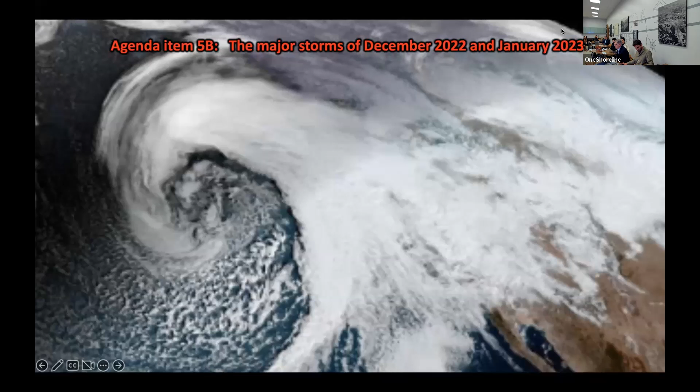This item concerns the major storms that many people have been talking about, and you've undoubtedly had presentations or discussions on it in your city councils and boards of supervisors. We'll discuss it today from One Shoreline's perspective, and also invite representatives of two cities to make brief presentations. Azalea Mitch is here, the Public Works Director from the city of San Mateo, and on the Zoom line is Lisa Peterson, Public Works Director from the city of Pacifica. First, I'll go through a brief summary of some shoreline activities.

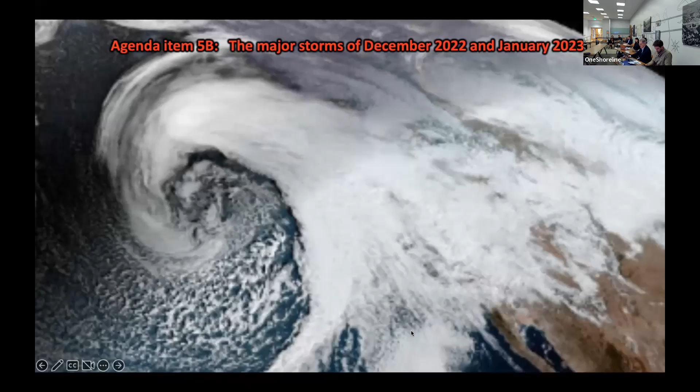Here's my high level take on the storms: the pattern of extreme storms that followed extreme drought is extraordinary when viewed through the lens of the past, but in terms of the future, it's considered ordinary. That's the way I think we should all be thinking about it — not that this was some once-in-a-lifetime event, but that this is the new normal, and we should start making decisions based on that. Certainly we are trying to do that here at One Shoreline.

The flooding impacts near both the Pacific coastline and the bay shoreline are increasingly compounded by high tides and sea level rise, and we've already seen that. Finally, most of the storm impacts cross jurisdictional lines, and that really speaks to why we're all here today, having created One Shoreline a few years back.

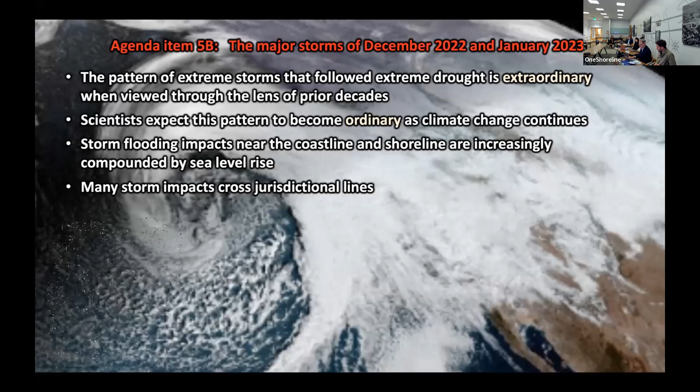A couple of images to show. This was an image from the mobile home park in the city, called the RC Trailer Home Park, shortly after the December 31st storm. This is an image of one of the residents taking us on a tour. In the middle of the picture is one of their seriously antiquated and overwhelmed pumps tasked with moving water out of this mobile home park and into the Bayfront Canal, where we did a project.

We'll talk about the Bayfront Canal project and how it performed. But I wanted to highlight that this area of five mobile home parks is not going to improve just because of our project. They need to be able to move water out of their area into the Bayfront Canal in order to completely eliminate the water buildup. They had a much better winter, a better experience resulting from the storms, than they would have had without our project, but they still saw flooding. Until these pumps are addressed, they're going to continue to flood during these major events.

The next picture is from a water treatment plant in Half Moon Bay. Thanks to Debbie Ruddock for this photo, which she took on the 31st. This is the electrical room, part of an electrical building that provides energy for the water treatment plant. I was there about one to two weeks afterwards with Debbie and one of the plant managers, and there was approximately 8 inches of water in the building — above the level of some electrical equipment and some conduits between equipment. That's a very serious issue that needs to be addressed.

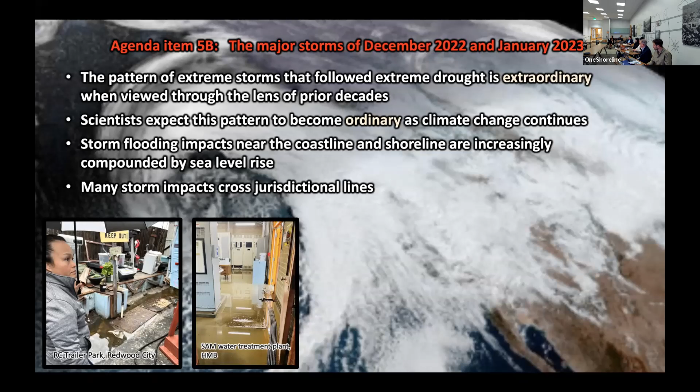They were able to break the vegetation jam and the water stopped flowing in, but they had to turn on the pumps. We were very close to just losing power, which would have been devastating. It was terrifying — I was the chair of the sewer authority at the time, so I was running out there with my waders. It was not a good situation.

Sticking with the coast for a minute, this is Highway 1 at Surfers Beach, and you can see how close the erosion is now getting to the highway and the cars. This picture was taken after the storms concluded, and this highlights the connected nature between what's happening there at Highway 1 and Surfers Beach with the whole area of the Pillar Point Harbor. Despite the fact that Caltrans has been trying to armor the highway with all that rock placed there, which you can see on the left of the picture, it's not working, and the erosion is getting very close to the highway. Obviously Caltrans knows a lot about that.

So was there additional erosion because of the storm? Yes, additional erosion, and actually a significant amount of additional sand deposition just south of this area that we saw pictures of. It's all tied together as the problem of too much sand in some areas, too little sand in others. The too little sand definitely contributes to the erosion problem, and this was made worse by these storms.

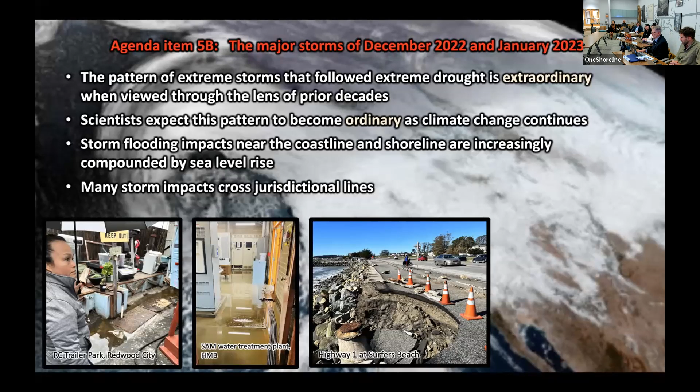And then finally, a little bit of levity, in San Carlos at the Trader Joe's. This is a post from somebody that says, if you need anything from Trader Joe's, bring your kayak. There was a lot of water at this location, which is a Walgreens and Trader Joe's — I'm sure Mayor Rak is well aware of that. There were people kayaking to get to the spot, but it was closed, actually for a couple of days, because of the cleanup afterwards too.

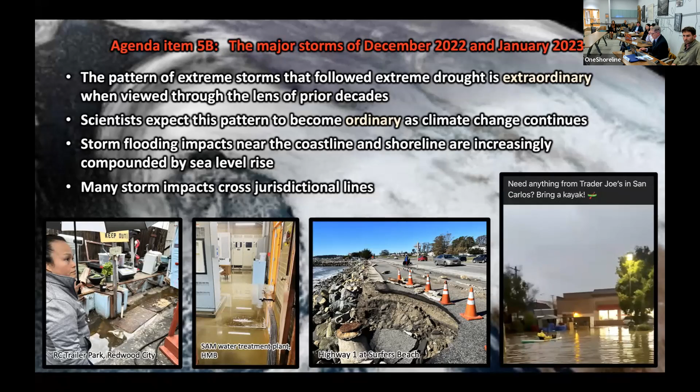So those are some of the impacts. In terms of our activities, I'll divide it up into about 5 areas: the Belmont Creek dredging that was mentioned in one of the public comments, the Bayfront Canal project that we concluded about a year ago, San Bruno pump stations that we own and operate, mapping flood impacts and our early warning system, and then, as I mentioned, the City of San Mateo and Pacifica discussed this too.

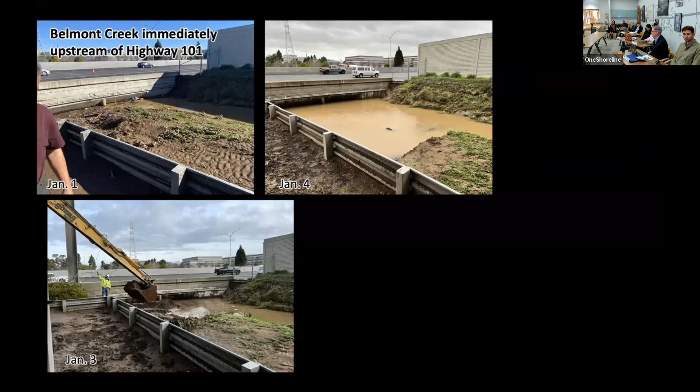There is a very large electronic sign for the highway, and it was in the way of the equipment. We also needed to get out there that day because the storm was coming, and we moved to a portion, an area upstream, that we'll talk about in a second.

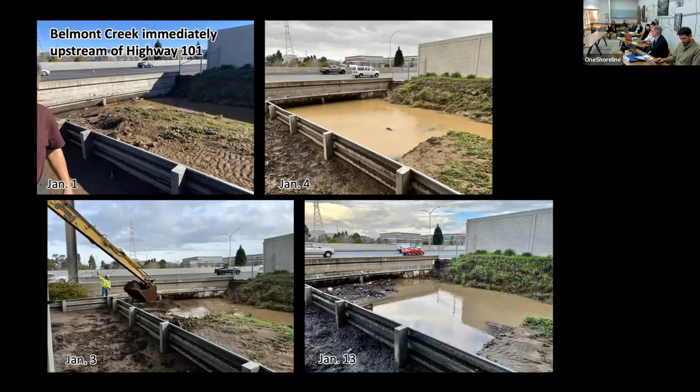This is a picture of the same spot 10 days later. What you'll see is there's debris that's built up just at the upstream base of the highway. That's because underneath the highway there's still a lot of mud and the debris can't flow through. So the city of Belmont and the county have been in touch with Caltrans numerous times to see if they can clean out underneath the highway. Until they do that, there's going to be a big problem here still, no matter how much we do upstream. That's something we all want to keep an eye on.

And then, as I was saying, upstream we wanted to go on January 3rd. This is work that was done in the evening of January 3rd by Industrial Road, an area that also flooded on New Year's Eve. So that was a key activity of ours, to quickly get that contractor out there and dredge the channel.

In terms of Bayfront Canal—we have a question. Yes, of course. So back on that past slide, when you have to dredge underneath these walkways, bridges, or freeway, does that have to be done by hand, or is there equipment that can get in there? Well, there is equipment that can get in there, as far as the equipment can reach.

I'm not really sure how Caltrans will solve this problem. In my previous position, I was at San Francisquito Creek JPA, and we dredged underneath a frontage road called West Bayshore Road, and their equipment could get pretty far under there, probably in the range of 25 to 30 feet.

So that's kind of what we would expect. You would want to do that when it's dry and not during a storm, and that would probably aid in the ability to get under there. But it's hard, it's challenging. As you can see, as much as you can tell from the picture, it's a pretty small opening. And unfortunately, it's smaller than the width of the channel upstream of there, so it's going to be a big challenge.

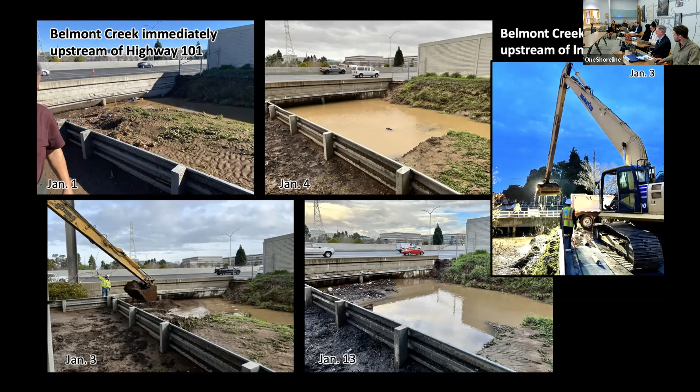Okay, I'll advance these. Bayfront Canal. The December 31st storm was more intense than the last biggest storm they had. They've had flooding since December 2014, but that was a very large event for that area. This storm was more intense and coincided with a higher tide, but they saw less flooding. So that's how we were pretty confident that the project we completed there made a difference this time—the conditions were worse, but the flooding was less.

But they did see flooding, as I mentioned, and that's largely on account of the pumps specific to the mobile home parks. Street and surface flooding, I would say, is a result of storm drain capacity in the area, which is challenging.

So Len, can you talk a little more about the pumps themselves? Is the property owner responsible? Are we required to do anything to help improve the pump? So it's complicated there, specific to the mobile home parks and the one trailer park. They are regulated by the state of California, as I understand it, by the Housing and Community Development Department. When I was out there and showed that picture of the woman with the pump, we were there with Senator Becker and his staff and Redwood City staff, talking about how to make progress on this. It's a very difficult situation because the city doesn't have jurisdiction to work in that area, from what the city reports.

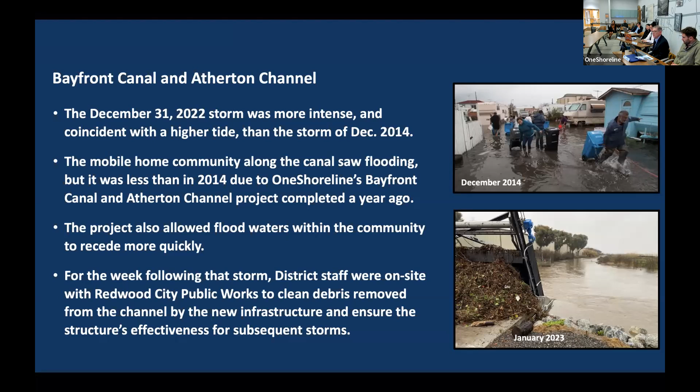It was really the first time it was tested since we put it in, and there were problems with it, but the problems were solvable, which is great. And it worked. So that's Bayfront Canal. Any other thoughts about that?

So in terms of San Bruno, we have at One Shoreline a flood zone there that we inherited from San Mateo County, and we get property taxes from residents of San Bruno to pay for, operate, and maintain the pump stations there. San Bruno has a history of frequent flooding for a community called Bel Air, which is probably one of the least resourced areas of the city. So we've been working with the city and the San Mateo County Public Works to monitor and maintain the pump stations. They drain water from the streets of the Bel Air neighborhood and other parts of San Bruno, and they pump it into the creek.

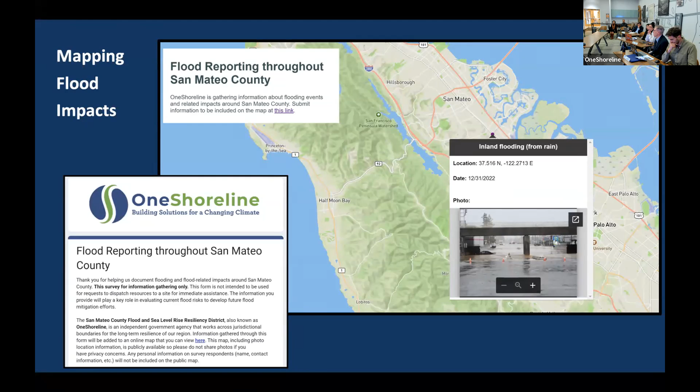Okay, kind of pretty soon wrapping up. We also developed an online resource to map flood impacts, and we're just about ready to launch it. We've collected a lot of pictures, a lot of data about the storms, and we want to collect more of that, not just to understand the current situation, but also as we plan future projects and where water is going right now. There will be more information coming shortly, I'd say in the next 10 days or so, when this is ready to launch. We'll invite people to upload their photos, and we could geotag it for specific locations in the county. That could be publicly available information, but it will certainly help us with our project design work.

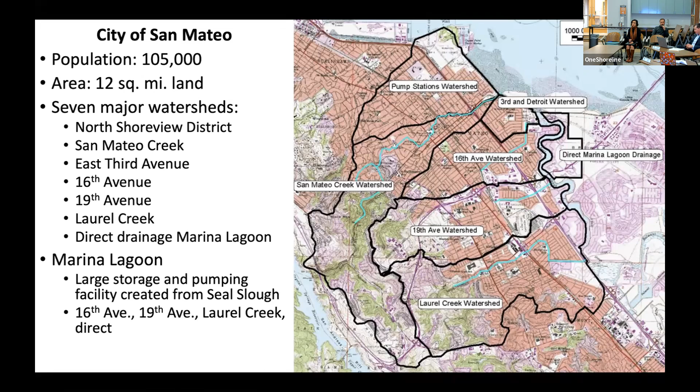Next slide. So in terms of wet weather, we actually begin preparations in October. We have quite a few hundred miles of sewers and storm drains. When it rains, our sewer system capacity is exceeded, and we often experience sanitary sewer overflows. So that's something that we have to monitor as well. Although we have a $1 billion program, and we're investing in building new sewers and expanding the treatment plant that we also operate.

In total, we have 37 pump stations that we maintain and operate, many catch basins. I have to say that I always have to speak about our workers, because for those 37 pump stations, we have a pump crew of 4 staff. So when folks call us and say we haven't seen you, it's because we've got 12 square miles.

A lot of lines of sewers and storm drains that we have to clear up. So we're constantly clearing catch basins, trash racks, as Len explained. We have devices that help move trash out of our creeks, and we move leaves and debris. We have a 24/7 sandbag station where anyone can go and make their own sandbags. When we have a wet weather event, we ask our workers to get on standby. If we have an issue 24/7, we call them up so they come and address it.

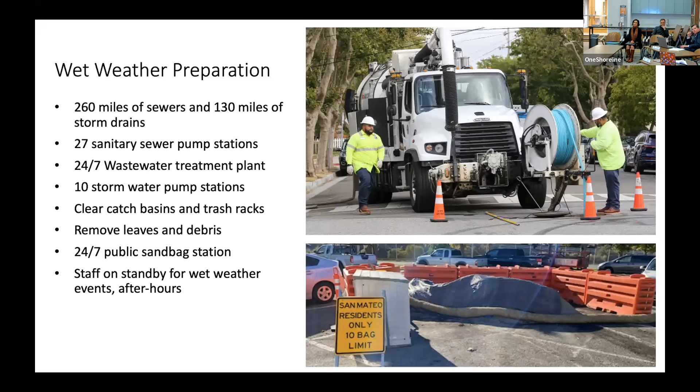In terms of New Year's Eve, as Len said, we had something that will become more normal. We were expecting 0.95 of an inch based on National Weather Service reports, looking at the gauges in the city of San Mateo. We actually received 4 to 5 inches. Within 3 hours, that registered in sections of our watershed as a 100-year storm, and in 12 hours it was a 200-year storm. We were very overwhelmed, and it happened beginning at 3 in the morning.

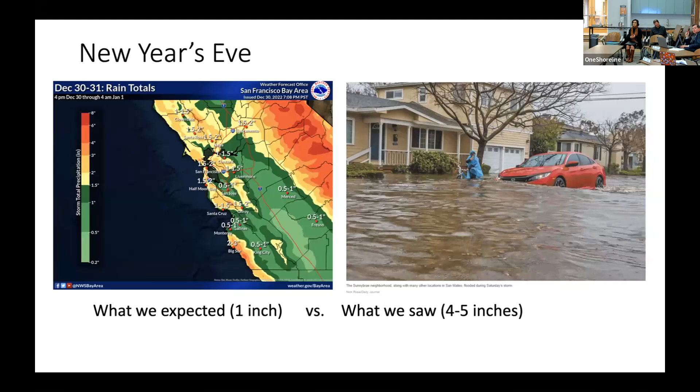We received alarms at 5 in the morning, and by 8, that's what our residents experienced, a lot of flooding throughout the city. We responded as best as we could. These pictures were actually taken, 2 of them by me. Our staff had been there since the early morning hours, removing trees that washed down and doing what they could on catch basins. Then we had our 42nd Avenue underpass flood because the pump station was overwhelmed and the motors were underwater, so we had to respond very quickly to a life and safety issue.

Dealing with underpasses, there were pumps there, but they weren't working. The water level got so high that it submerged the pump station.

That was New Year's Eve, and then we were expecting a much larger storm on the 4th. So we opened our EOC, our city manager and city council named the local emergency. We developed traffic action plans so that we would be ready to close streets prone to flooding, like 42nd Avenue, which we were very concerned about flooding again.

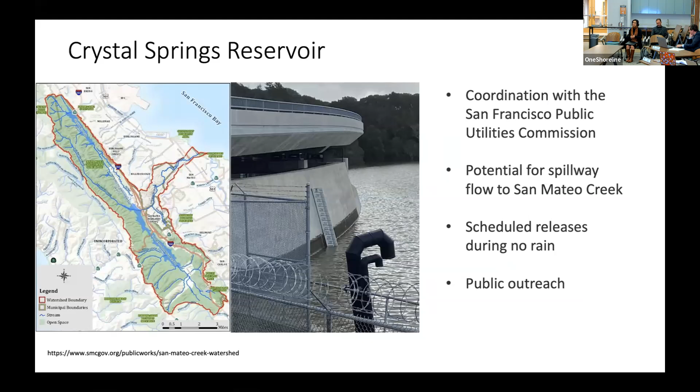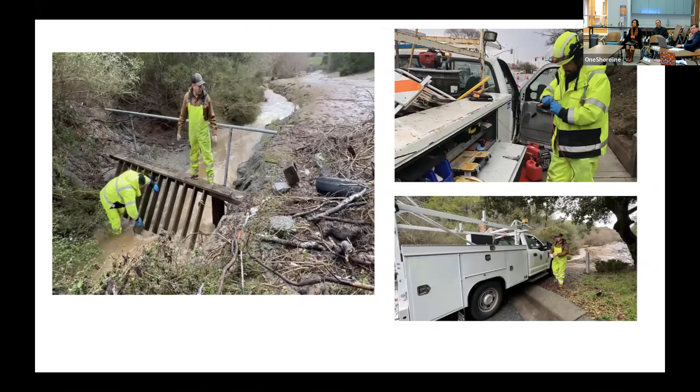This is an example to the left of a trash rack, this is Laurel Creek. Our staff have to go into the creeks to remove debris, you can see a tire, and I think they were removing bricks as well. We have to make sure that these racks stay clear so the flow is not obstructed.

This is San Mateo Creek, where a lot of vegetation was removed. We also have trash racks on this creek, and we have to make sure they stay clear so that we don't spill onto properties.

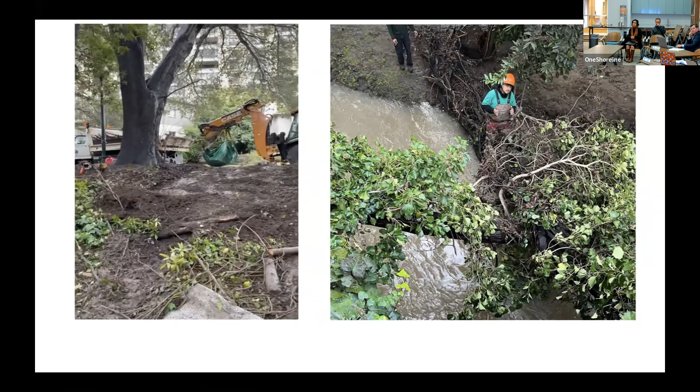A lot of people power goes into maintaining these systems. We also communicated with the community through website updates on things they can do to better prepare, get sand, and sign up.

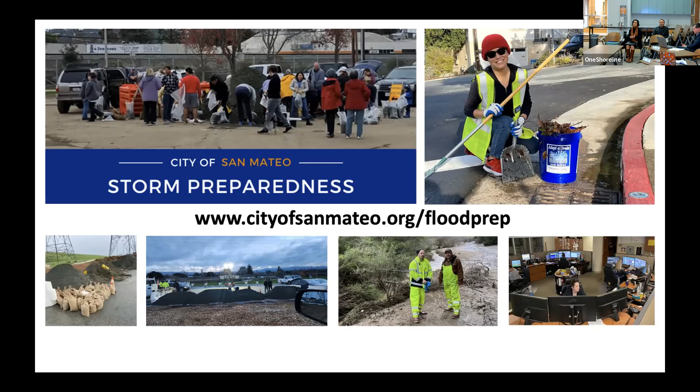Good afternoon everybody, I hope you can hear me okay. Yes, okay great, thank you. I'm going to start with a little narrative of what happened in Pacifica, and then I'll try to share some photos of the flooding.

For those who don't know, Pacifica is on the coast and we have about 40,000 residents. We have a wastewater treatment plant and a number of pump stations, both sewer and storm pumps.

Prior to the storm event, we did a number of our typical storm cleaning events with our staff. We generally expect larger storms in the winter, so we have a pretty good program to go out there and clear the channels and make sure we're ready and prepared for any big storm events. We always overstaff for these events as well.

During the storm, between December 26th and the end of the storm events in mid-January, we had about 20 inches of rain in Pacifica. The big one for us was the December 31st event, where we had about 4 inches of rain in a 12-hour period, which was quite large and much bigger than the bomb cyclone that hit us last year in October, and had more damage because of it.

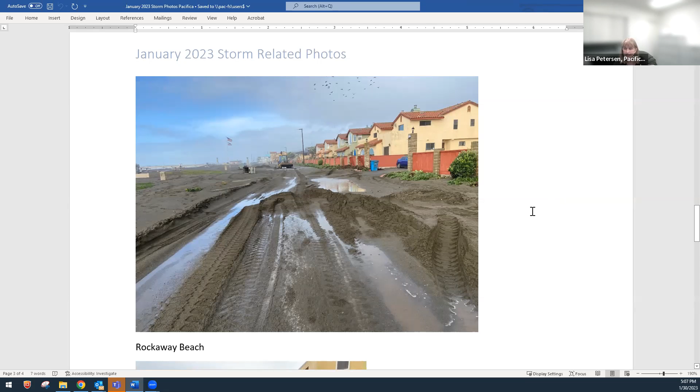So that flooding was combining with the problem of us not having a seawall of adequate height. A number of these homes in this area did have flooding and are going to have some damage. The last area I wanted to show you was our Rockaway Beach area, where we had flooding due to an undersized storm drain. Here's another photo—we experienced a number of locations with flooding.

It would be great to have some funding to help with both our seawall at the Beach Boulevard area, where we saw a number of homes get flooding in the lower floors, and of course the Anza-Aguela area as well, where we have that $6 million improvement we're trying to find grant funding for. And that was the end of my presentation.